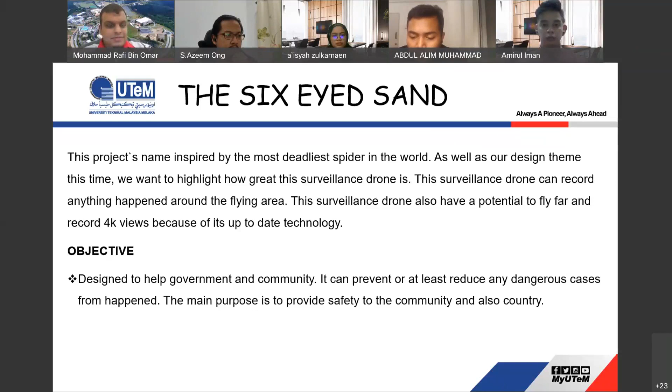For the scope of the project, it is the project target for any company in safety, management, business, and government. So the problem statement is...

Because of incidents of prisoners escaping from prison, sometimes we hear news about such incidents. This happens because of the lack of surveillance from prison management, and this problem causes trouble to the community and government.

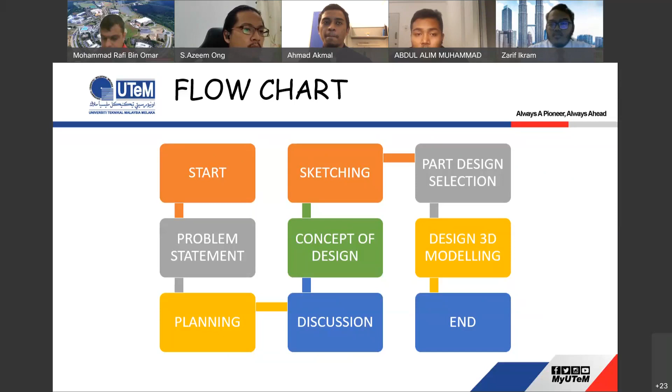From there, we came up with certain sketches, from the first sketch to the final sketch, and afterward we proceeded with the modeling in the Catia software.

This is our first sketch and second sketch. We discussed it to revolve around a box shape, a drone which has a box shape.

From the first sketch, we had a kind of empty design, something like that.

Then we proceeded to have a camera holder under the bottom plate, so it can mount a phone or any device.

Even a GoPro. After some discussion with the lecturer, we managed to make some improvements to cover certain areas of the drone.

So we have a more secure place for the motherboard and the battery and everything to be mounted inside. We also have a connected lid, so it will have a stronger structure for the lid part.

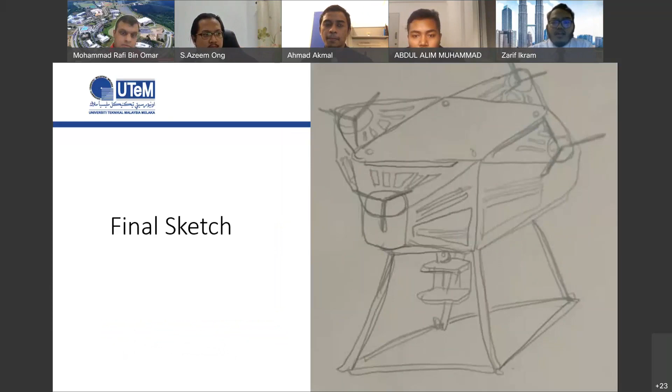This is our final design, final product.

Basically, we assemble the product using only screws and nuts.

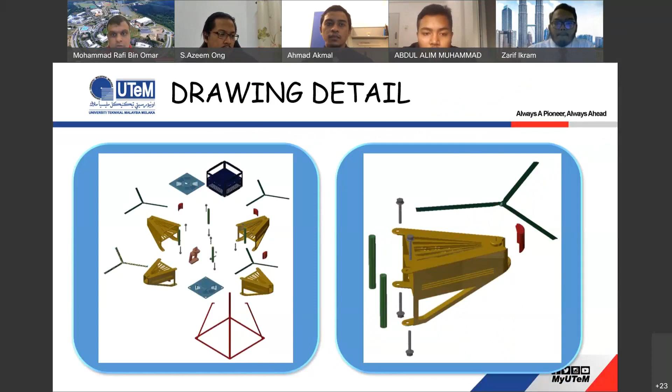I am the product engineer of the team. I have gathered information. There are 15 equipments needed to complete the project, so there are 15 items.

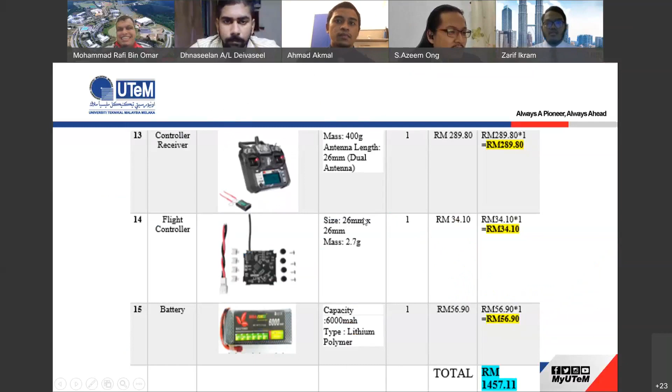Yes, this one. Mr. CAE engineer, can you explain how you prepare for the pre-CAE simulation? What are the boundary conditions? What are the mesh size and why you pick that figure? Please.

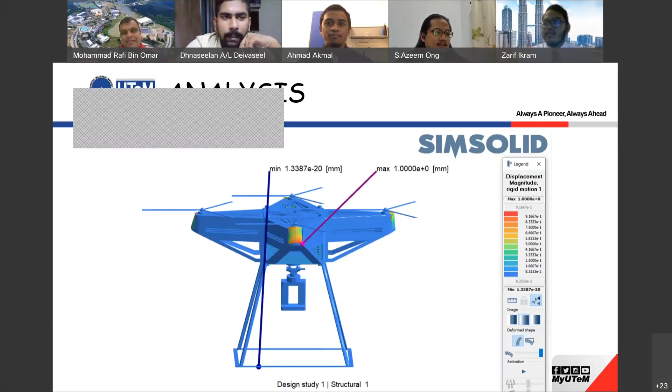I think it's a bit complicated because to find the exactly same item at the shopping platform, maybe... That means your drone doesn't follow standard parts. We can't find the exactly same item at the shopping platform, that's the problem now, so I just get the picture which is almost the same as the design we sketched.

Because each of our parts is actually designed - so your answer is it cannot be fabricated lah. Okay based on our current tech, not possible lah.

Okay sekejap, Pi. Zarif? Zarif nak cakap. Okay silakan, sorry sir for interrupting.

In my opinion, it is possible to fabricate because each part were made by carbon fiber, which is a type of plastic, and based on current technology, which is the 3D printer, it is possible to fabricate. The top plate, bottom plate, and the case are made from aluminium, and it is actually possible because the design is quite simple and not too complex. So I think it is possible to fabricate.

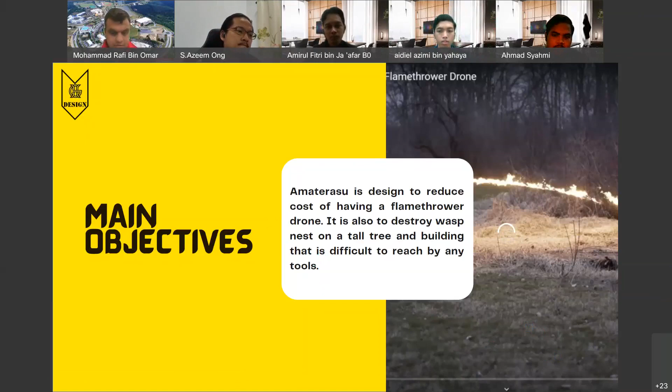Next, I will describe the main objective. Amaterasu is designed to reduce the cost of having a flamethrower drone. It is also to destroy wasp nests on tall trees and buildings that are difficult to reach by any tools.

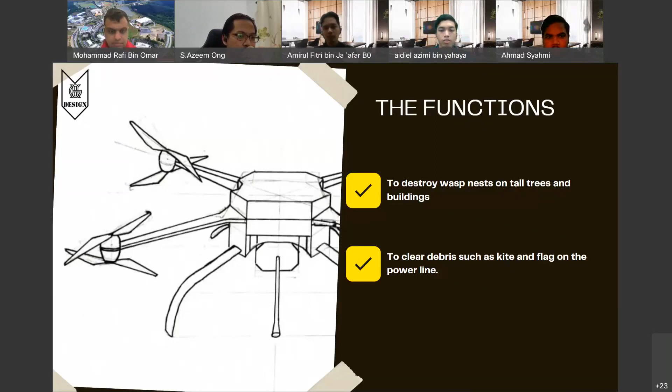The function is to destroy wasp nests on tall trees and buildings. Second is to clear debris such as kites and flags on the power line.

Assalamualaikum warahmatullahi wabarakatuh. My name is Mohamad Luqman Al-Hakim, and a very good evening to all the fellow customers. I am a designer in my company and today I will present my part.

Yes. This is our final design for the CATIA, where we designed our drone in CATIA. That's all.

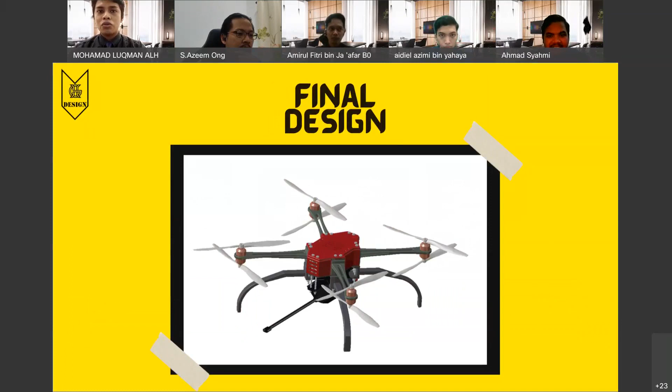And for calculating and costing, next. So this is our costing to design Amaterasu. We can see the drone parts and quantity that we use. So the total price to make the drone is RM 2,075 ringgit and 28 cents.

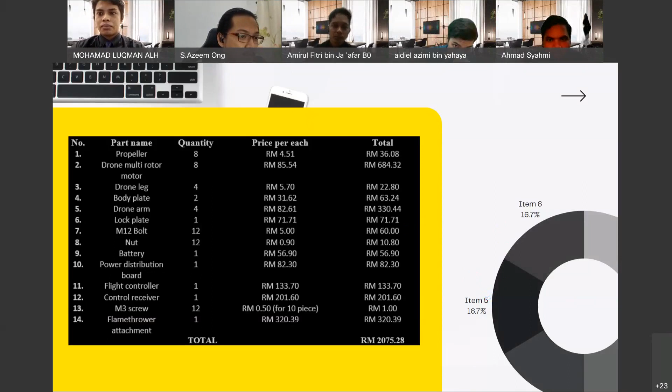Hello, I'm Arif as a production designer. I want to share about the analysis result of our flamethrower drone that was tested in SimSolid.

Okay, for the von Mises stress, a value is determined if the material can sustain the given load. It also determines whether the material will yield or fracture after it's exposed to the certain load.

It also will not cause the material to fracture, which is still in the elasticity phase since the von Mises stress is still below the yield stress.

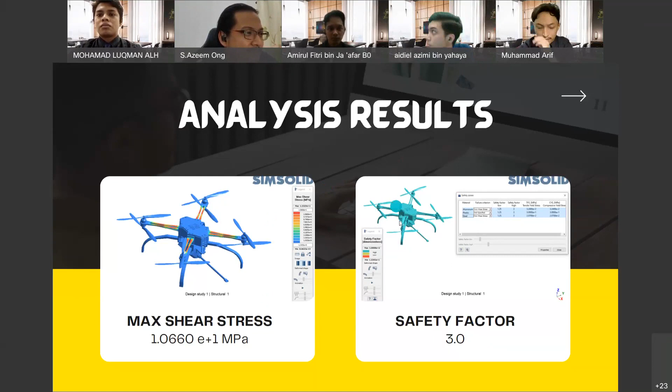Okay, that's all from us, let's watch our video montage.

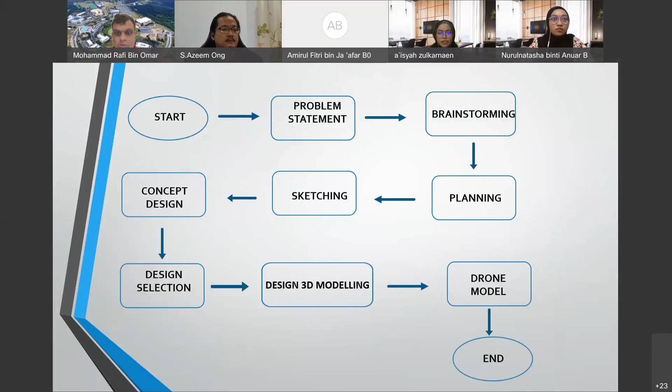So basically, this is our basic timeline project, which is problem statement, brainstorming, planning, sketching, concept design, design selection, design, 3D modeling, and drone model. This is our timeline project.

So our drone Hawk grip delivers products quickly to virtually any location, improves time management for all parties, conserves energy, and it is a technology that helps us save time as well. Hawk grip offers a safer delivery system that offers a higher level of efficiency, a positive effect on shareholders, and could reduce consumption levels.

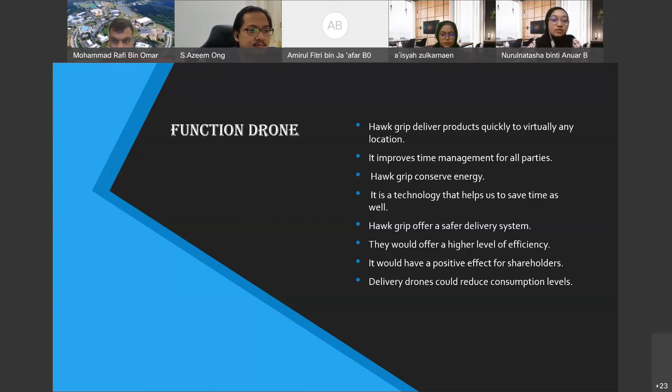So this is our final product of the sketching drone, and this is how it looks when it's worked. Before we proceed to the detailed drawing, we have prepared a montage.

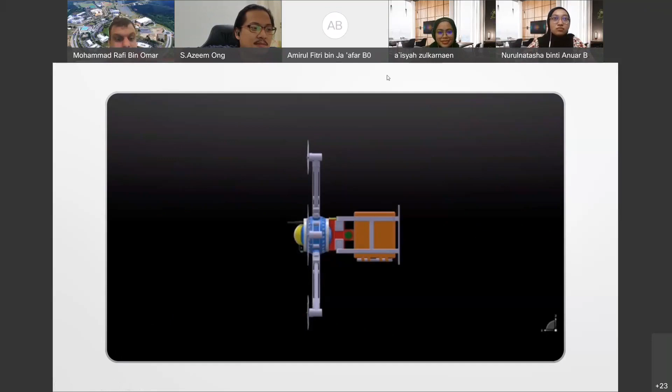Sorry, kalau tak ada suara tak apa kau. Tak ada suara, tak okay, apa. Okay, it's okay, tak no apa, tak problem, apa. Play je, proceed.

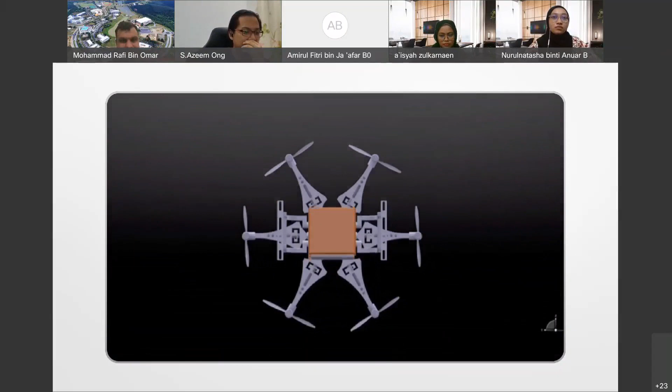So this is our detailed drawing. Basically, our drone consists of a propeller, motor bracket, cover motor bracket, motor, and as you can see here.

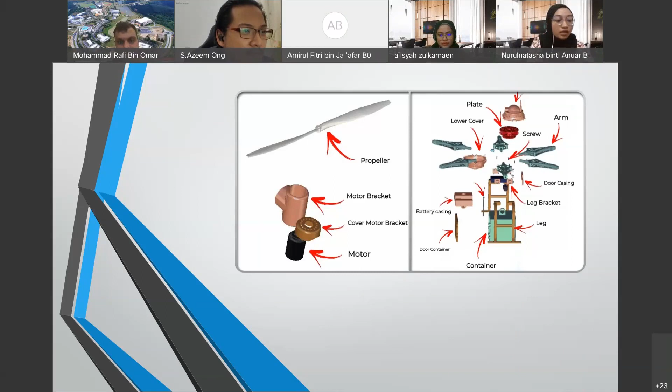We ran an analysis for our drone. We found that the maximum displacement is 9.0411 millimeters, and after a few tests, we finally achieved a safe drone.

Last but not least, this is our cost calculation. This is showing the part assumptions for the price from Lazada, Shopee, and so on. Our drone basically costs 901 ringgit, so we can say our drone is affordable for agencies that want it.

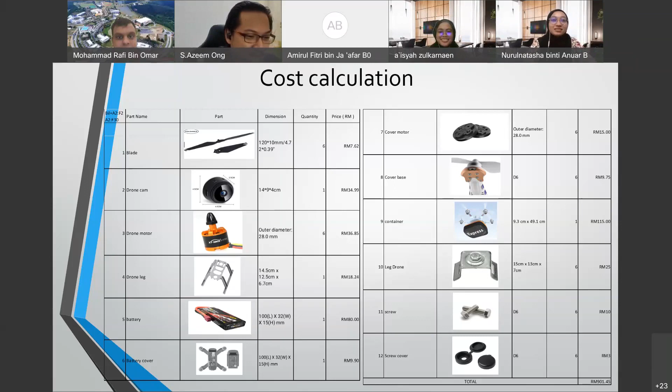Okay, my first question before Encik Azeem asks. What was the most difficult part you designed in your drone? I see it's all geometric shapes only. Maybe we need to ask the designer, who is your group member, group designer.

Assalamualaikum, my name is Alif Iqmal, the designer. The difficult part to design this drone was the arm area to connect it with the fan bracket. For me it was difficult because it has many shapes.

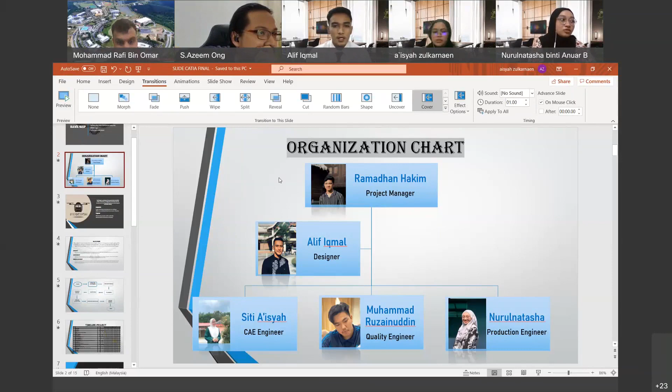Maybe Aisha can go to the part, slide number 11. I have designed many shapes to decorate and manipulate with the physics concept, and to manage the propeller bracket to connect with the arm.

I'm very interested in your answer - what do you mean by fitting the physics concept?

Okay, my question: where is the center of gravity for this drone? The center of gravity is at this position, as we can see between the container and the main drone body.

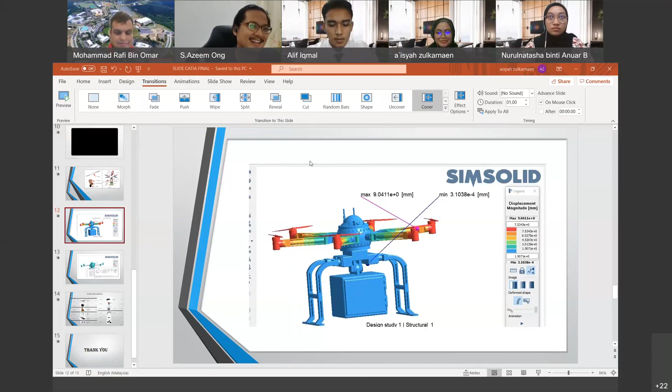No, go to the next one, the next slide, that one.

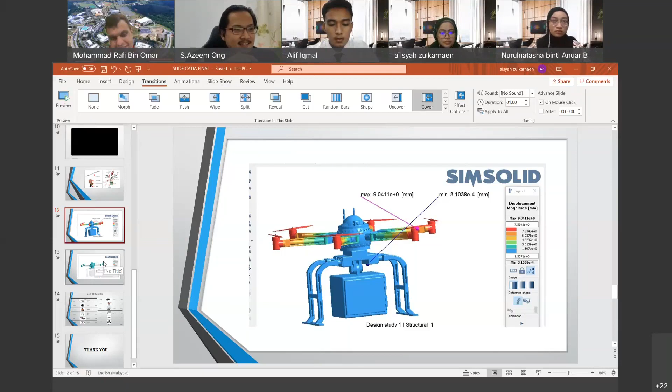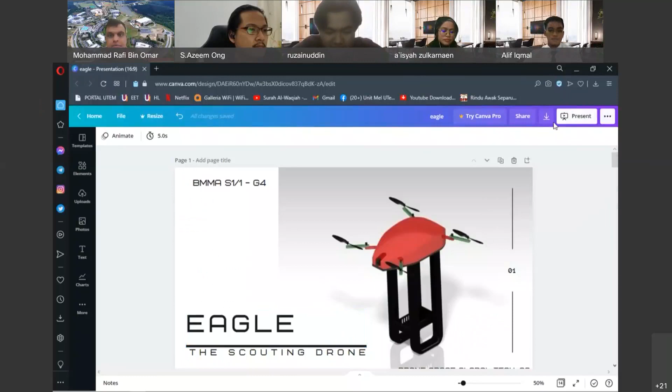Alright, okay, proceed. Bismillahirrahmanirrahim. Assalamualaikum warahmatullahi wabarakatuh. We are from Group 4, section BMMA S1/1. We would like to present our scouting drone. This is the design of our drone. Next slide.

I'm going to tell the audience about us. Our company name is Drone Space Global Tech. We are a company that specializes in designing and creating drones and are known worldwide. Our slogan is 'Tech offers million possibilities.' What does that mean? It means providing ways to help people live a better life with the inventions that we produce. Next slide.

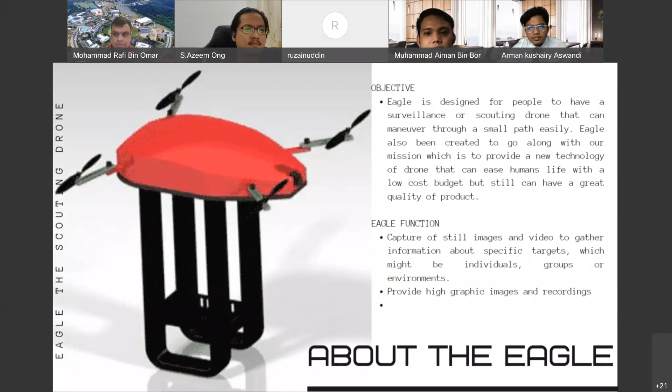Assalamualaikum and good day. Now I'm going to explain the concept of our drone. First is the body. We took the idea from a computer gaming mouse, because the gaming mouse looks more futuristic and fancy, and since we are living in 2021, we need a more futuristic and fancy design.

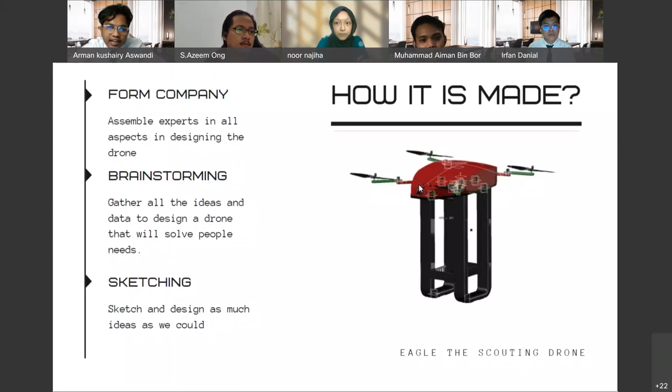Next I'm going to share how these drones are made. First, we form our company, assembling experts in all aspects of designing the drone, taking expert design sketches and expert design in CATIA. Then we proceed to brainstorming, gathering all the ideas and data to design a drone that solves people's needs. Third, we proceed to sketching, where we sketch and design as many ideas as we could, so we have many options.

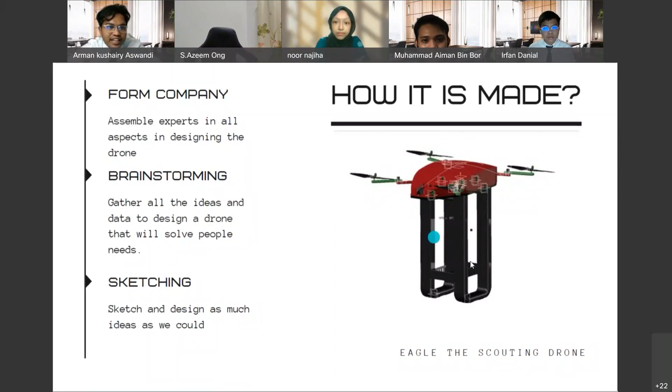After that, we proceed to design selection. Once we have the sketches, we select the best sketch design to proceed to 3D modeling. After that, we proceed to 3D modeling to design the 3D model of the chosen sketch. Once the 3D modeling is done, we analyze the complete design of the model, and then complete the design.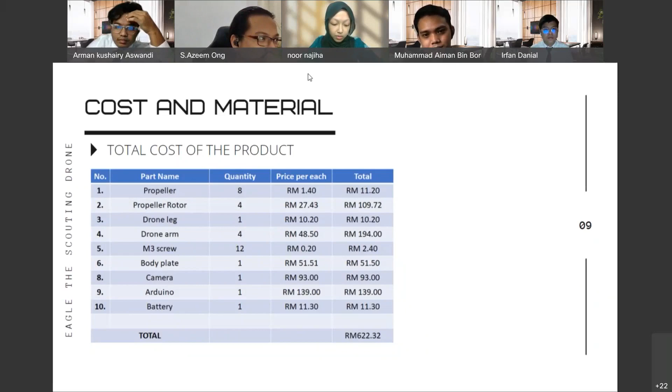After applying the materials to the drone, the weight of the drone is estimated around 586.47 grams.

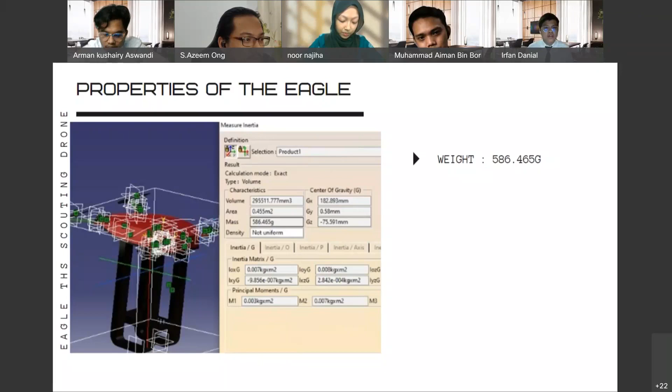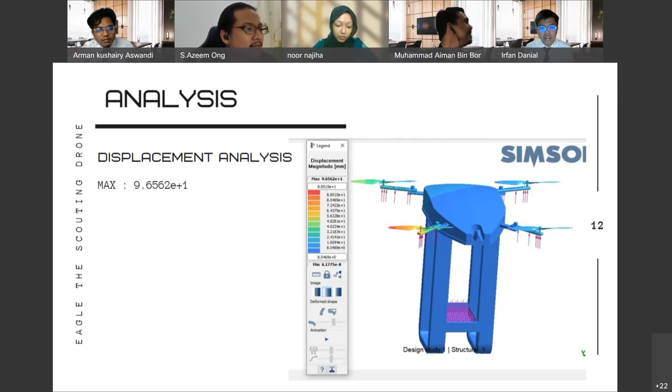That is all from us. Thank you. And we are going to show the video montage of our drone.

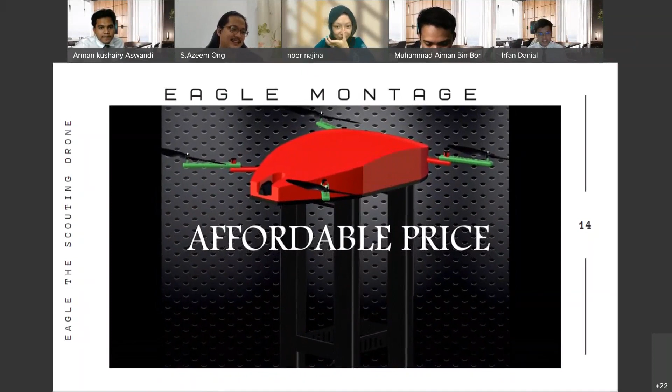We have reached the end of our presentation. Thank you.

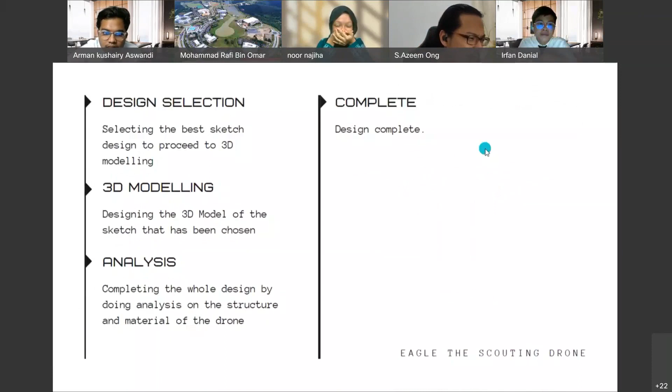Okay, one question. You mentioned that you benchmarked the helicopter for the leg of the drone. Benchmarking is very good, it's one of the most important parts in product development. But you said you made the leg longer because it is a lot more stable. Can you explain that and help me understand why making the leg longer makes it more stable? Actually, I have the same question, what is the main purpose, to carry the load or something? Answer it, Daniel.

I cannot say that the length of the leg is going to benefit the stability of the drone, but we just use almost the same shape as the helicopter landing skids, just made longer. But I don't actually know why we make it longer.

Let me give you a very basic principle for when you want to benchmark a design. The principle is very simple: if you want to copy something, you copy everything. Understand?

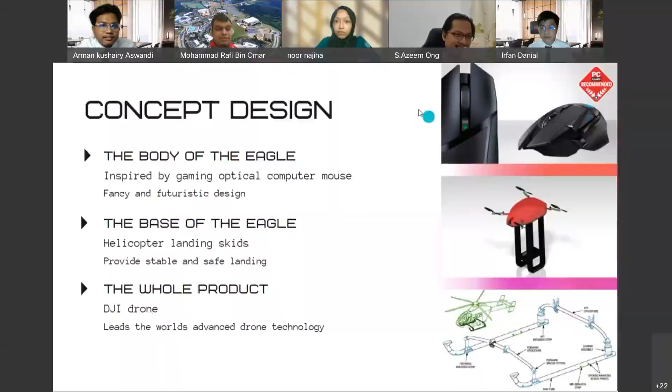Okay, my last question: how did you select your final design based on the concept designs you created? You actually have 3 concept designs - how did you choose, which method did you use to choose the concept design?

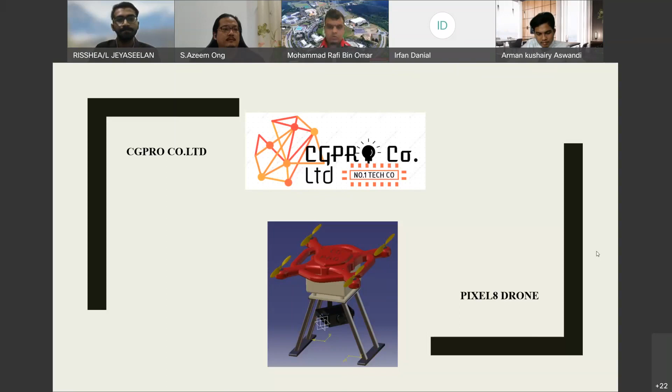Our team includes me as the project manager, where I'm responsible for planning, organizing, and directing the completion of the project.

Then we have Mr. Lee, who is our assistant engineer. We have Mr. Ghani as our designer, who designs the prototype, sketches, simulation, etc. We also have Mr. Alif as our CAE engineer. Finally, our product engineer, Mr. Jamal, ensures the product demands are efficiently met.

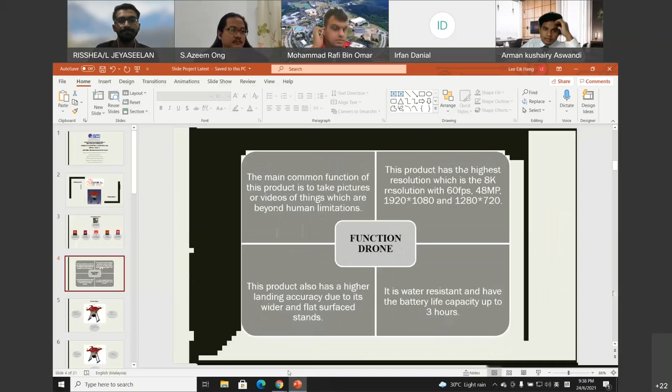Now I'm going to explain the function of our product. The main common function is to take pictures or videos of things beyond human limitation. It also has higher landing accuracy due to its wider and flat surface stand. It is water resistant and has battery life capacity up to 3 hours. Lastly, this product has the highest resolution, which is 8K with 60 FPS and 48 megapixels.

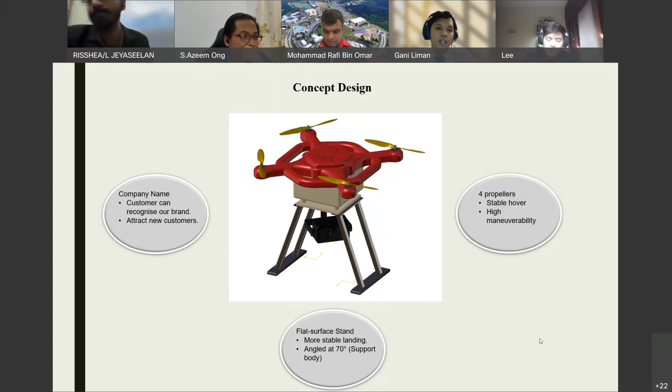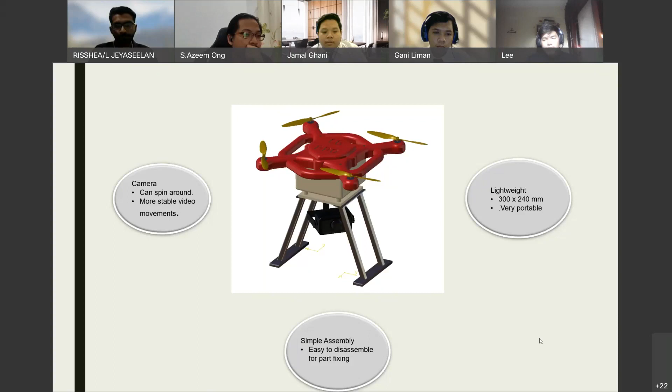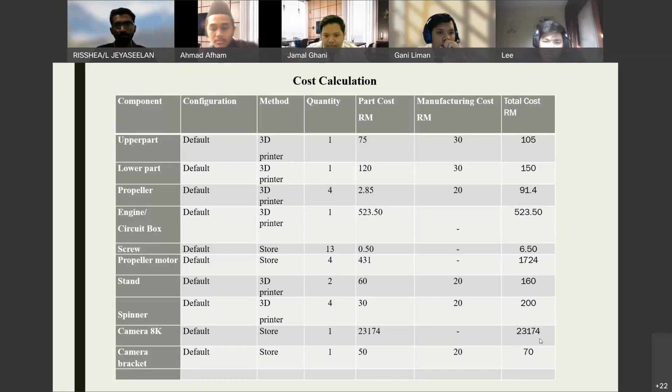Assalamualaikum, Tess. Can you hear me? Dengar tak? Dengar.

Assalamualaikum. My name is Imran Alif, and my part as a project analyst is to explain the analysis of our project, which is a drone. I was hoping the detail will attract you to gain interest and trust in our drone. Without wasting time, let's go to our first analysis of our drone, which is the pride of our company.

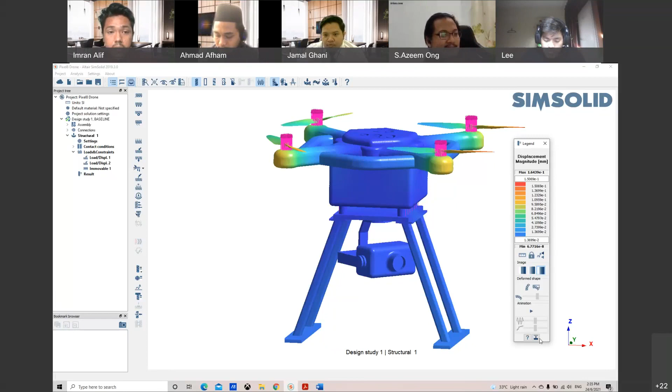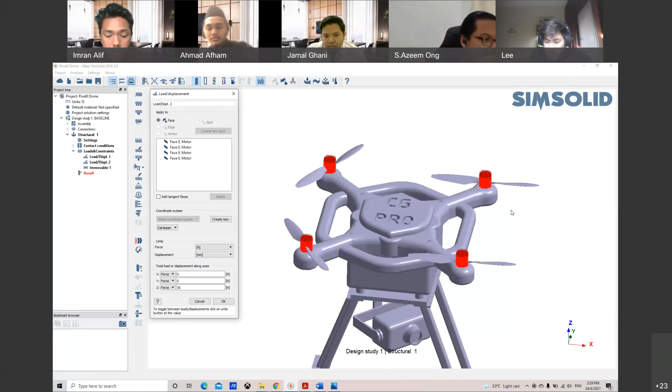And the fourth one is the applied force at the drone propeller. This acts when the drone flies.

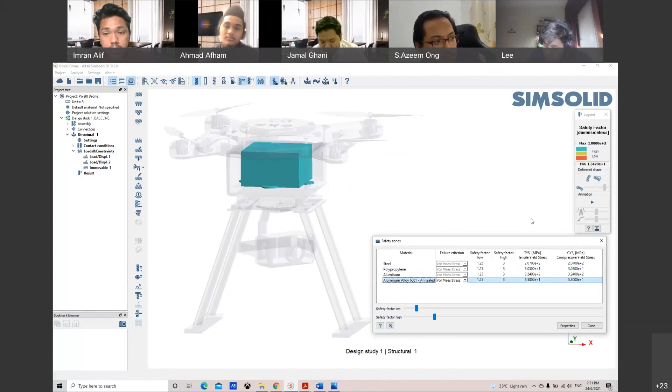And this one is on the motor of the propeller, which is 4 of it.

And this one is on the screw, each of the screw.

And lastly, this acts when the drone flies. The von Mises stress as shown is 1.5 and so on. For our reference, the safety factor is above 3, so for us it is safe to fly and to use.

This is the discussion on techniques to improve the design failure during analysis, because we had some difficulty at first using SimSolid and also the KTR, but we improved our way with the help of our respective lecturer, Mohammad Rafi, who helped us much to complete this KTR project.

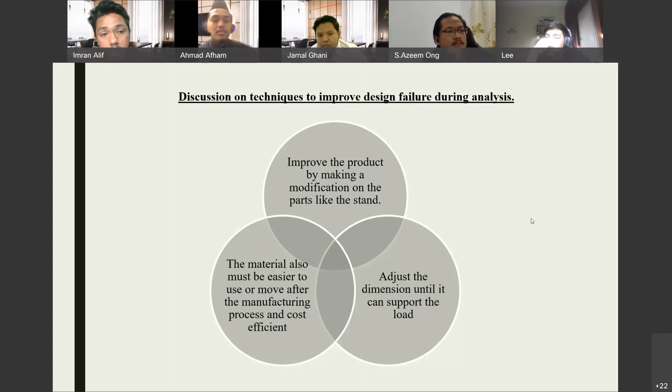The first one is to improve the product by making a modification on the part like the stand, so we can gain more stability by spreading more on the stand. The second one is the material must also be easier to use or move after the manufacturing process and cost efficient. The third one is to adjust the dimension until it can support whatever load we applied.

This is the sum of our ideas to improve, but we don't expect it to be a failure, this is just to improve. The first one is we can use a stronger and more durable material for the stand, to support landing and when it wants to fly. The second one is improving the bottom and upper cover to a smaller size and reducing the size of the circuit box.

Sir Azeem, please don't see our way to improve as a failure. This product will only go into market if it has a customer, which is you as our target customer. Okay, that's all from me, and I will pass the presentation to Rishi.

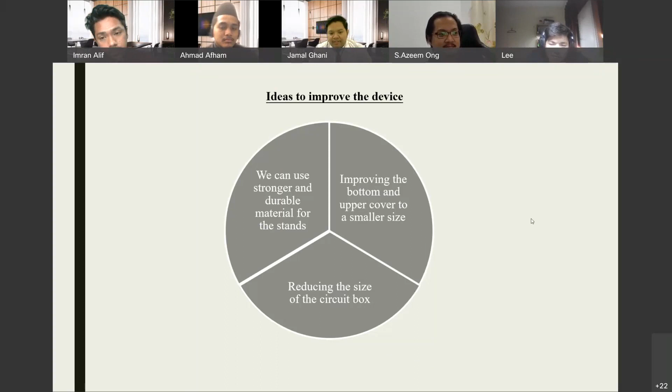In conclusion, the drone that we created and innovated is for higher resolution photography compared to any other. It is durable, lightweight, water resistant, and easy to control by anyone, anywhere. The safety measures were taken using SimSolid software. This innovation is designed according to the latest and upcoming future technology. Please enjoy our montage video. Thank you.

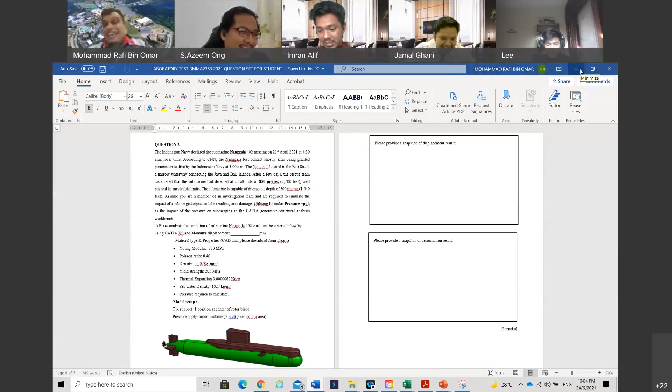Kata-kata terakhir ya. You guys are first year kan Rafi kan? First year, second semester. I believe you ada lagi 3 years kot approximately.

Maybe it's quite unfortunate during COVID banyak yang kita tak boleh buat. But try to find what you actually like, because the field that you guys are learning right now, Fakulti Teknologi Kejuruteraan, is very broad. So you need to narrow down what you actually have interest in, because you will be doing it for the rest of your life, unless your father owns a company, then no problem.

Cuma, just one more thing, don't say sorry if you think your English is not good. You don't have to say sorry. Because personally, our mother tongue is not English, our mother tongue is Malay. If Chinese, you guys are Mandarin, or if you're Indian, then Tamil. English is our second language. So if your English is not that good, you don't have to say sorry. As long as whatever you explain, the message is delivered, grammar terbalik ke apa ke, doesn't matter. Yang penting you speak and talk with confidence. Do not say sorry, okay.